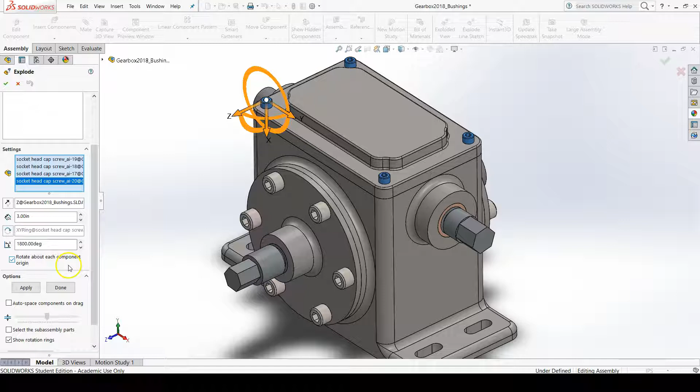What this is going to do is it's going to simulate an actual screwing in of the socket head cap screws into the gearbox assembly. So they will rotate as if they're being screwed into the assembly, which is nice and fun. Now to move them out, we just grab the movement arrow that is going in the direction that we want to move them. So left click and drag upwards.

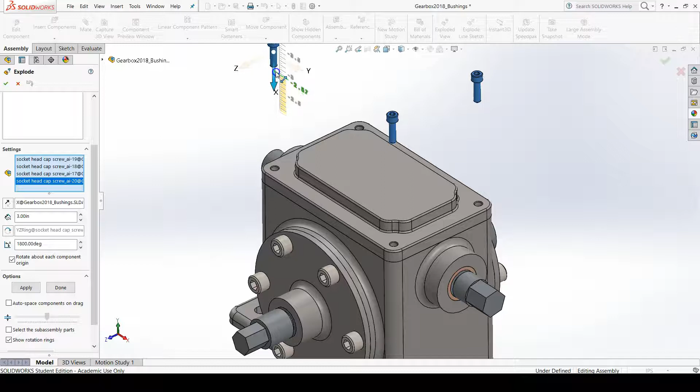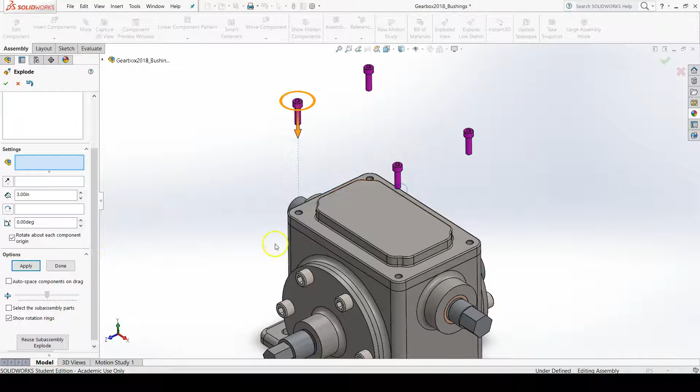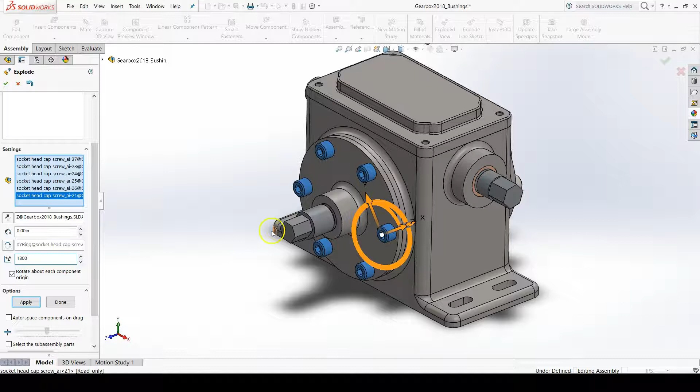I believe on the 2016 version of SOLIDWORKS, there is a little bit of a weirdness when it comes to moving components out with the rotate about each component origin checked. So to demonstrate that, I'm going to go down to these socket head cap screws here. Now the weird thing with 2016 is that when you have rotate about each component origin checked and you set up your angle, you're not going to grab the movement arrow that's going in the direction that you want to move it.

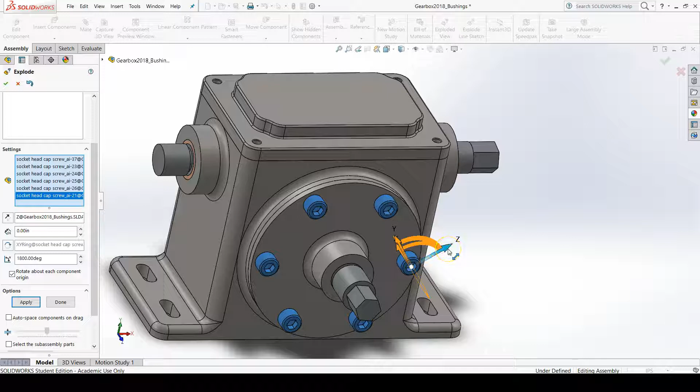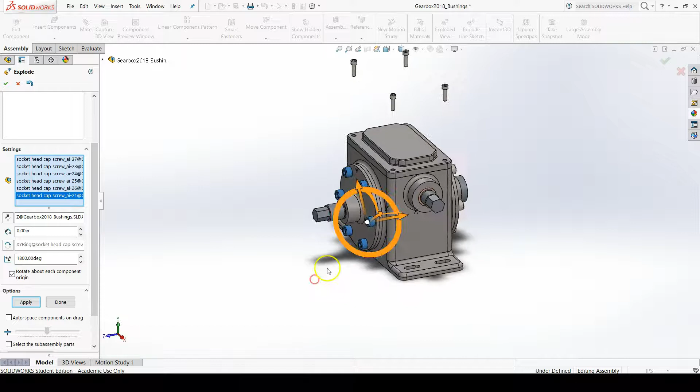You're going to go look down at your global coordinate system and see what axis is going in the direction that you want. In this case, for me, it's Z. And I know this is counterintuitive, but on the movement gizmo, you're going to grab that axis. So for me, it would be the Z axis. And I believe this is only with 2016 where there's that small glitch. So if you first attempt to bring this out and it doesn't work for you, try doing the movement axis that is being represented on your global coordinate system. But as far as right now, I'm not experiencing this problem with 2017.

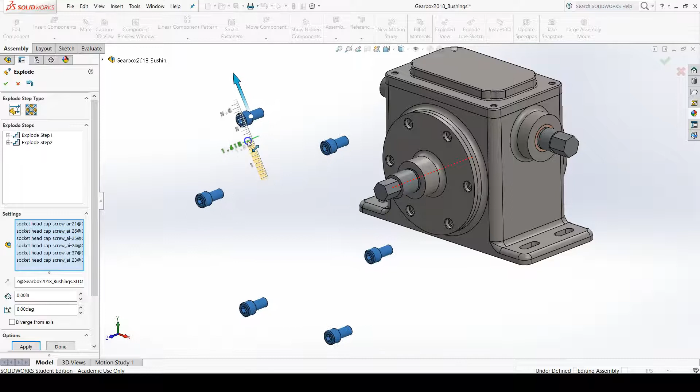So to continue on, we're going to move our socket head cap screws out. And not only that, but we're going to move them radially out too. So to add a radial exploded step, we'll go to the property manager and click on radial step in the type area. Select your socket head cap screws, and I just did a left click drag window over them all, and then grab the arrow to move them out. So I've moved these 6 screws outwards in the Z-axis and then radially out from their center axis.

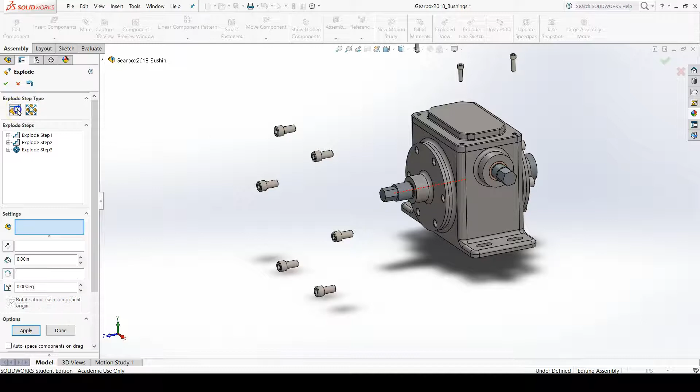So the rest is pretty straightforward. Everything else is a linear step except for the other side of our socket head cap screws, of course. But you just click on stuff and you pull it up. And they don't have to be exact measurements, but you can change them to exact measurements if you want. For example, I have this top cover that I just pulled up to roughly 5 inches.

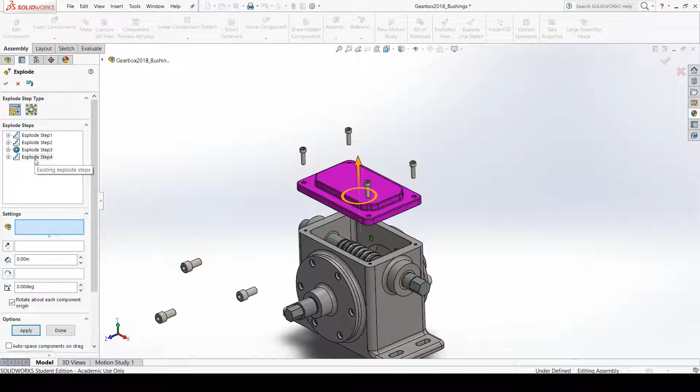If I wanted to change that, I'd go to the property manager, and in exploded steps, I'd double click on the step where I had originally set the distance. For me, that's explode step 4. And then I could change the distance here. So let's say I wanted to make it 1.5. Then I can press tab to see the result. When I'm done, I hit apply and done. And then I can move on to the next exploded step.

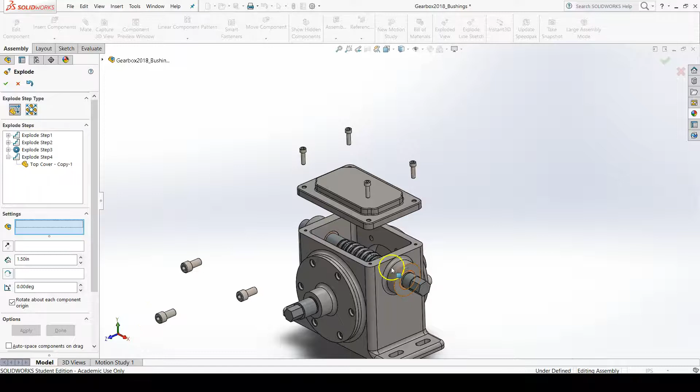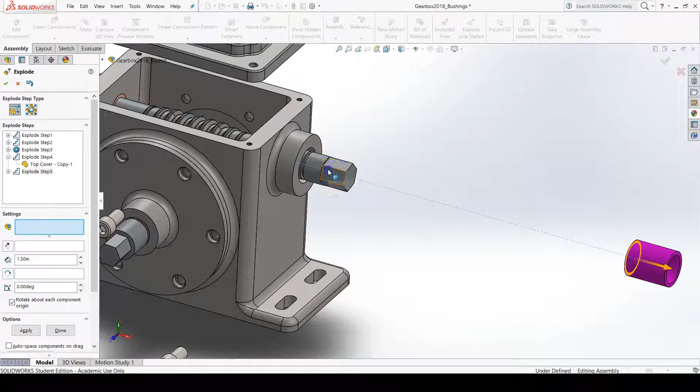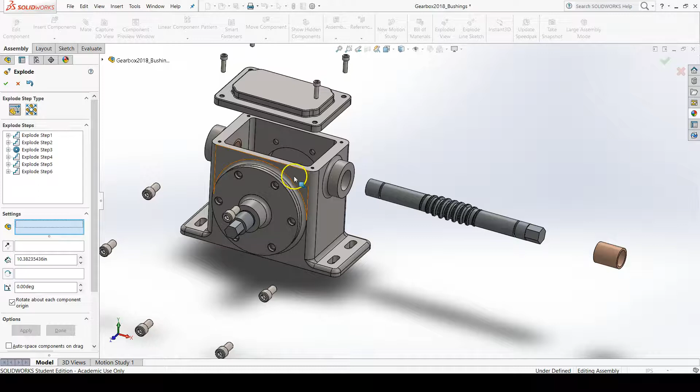So you're going to do something very similar for all of the other components. Whoops, I clicked on the wrong thing. I wanted to click on the bushing here. So I'd bring this out. Bring this guy out. Whoops, and it looks like I need to go farther with the bushing, so I can double click on that step and bring it out more. There we go. And say apply and done. And then keep going from there. So I'm going to leave the rest to you.

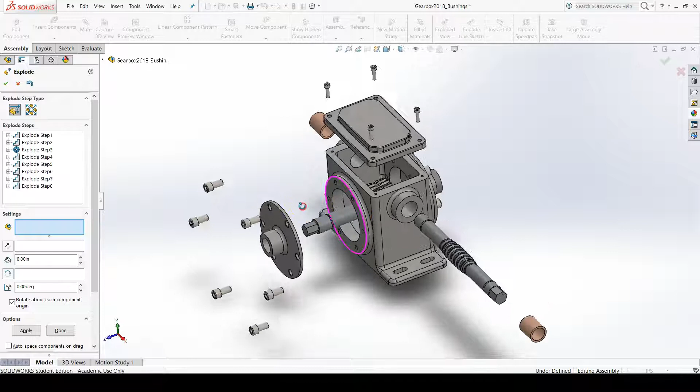Complete this gearbox assembly exploded view, and then watch the next video to see how to add route lines, which are going to show how all of the parts are going to fit together.